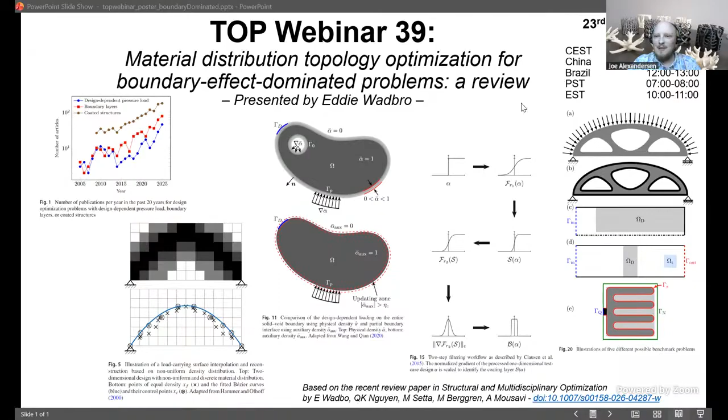And this is, well, I will talk about the review paper with me and my co-authors. It's a field that we're very interested in. We have read a lot, and also in the paper there are many, many references. And in my presentation now, I will have 0 references, but more focus on, well, trying to give you my sort of view and my interest on this paper.

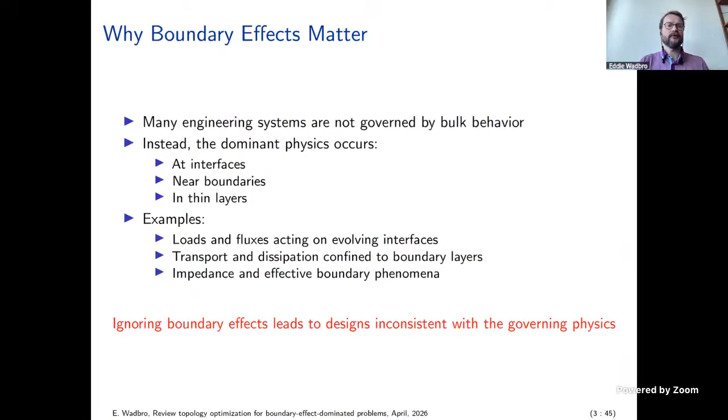And in all of these cases, ignoring the boundary effects and just looking at the bulk, well, we can of course use material distribution optimization anyway, but if the model or the partial differential equation we have does not take into account these effects, the designs will be performing well, but not for the true governing physics. So this is the whole idea why we started getting interested in this and looking into various problems for it.

So, and just trying to define, okay, what do I mean with a boundary effect dominated problem? So I put up like 2 major points, or 4 depending on how you count. So number 1 is the physical response depends critically on the position of the interface and the geometry of these boundaries. And the boundary itself, well, it depends on the design, and it's an active part of the governing physics.

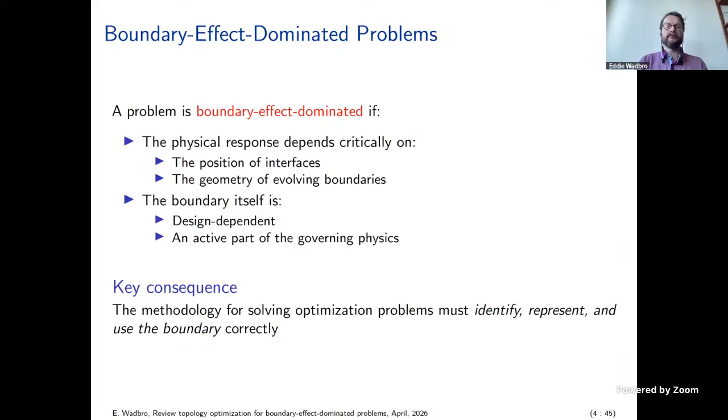So the key consequence here is that the methodology for solving these optimization problems must be able to first identify, represent, and use this evolving boundary correctly. So this is sort of the whole background for any optimization you want to do for these problems.

And also a graph from the paper, sort of, why these problems now? Looking at the growth of design optimization problems that involve design-dependent pressure loads, boundary layers, as well as coated structures over the past 20 years. And here I know that the coated structures are sort of not really boundary effect dominated, but since the techniques for coated structures sort of translate over, we decided to include this in this review as well,

because essentially the story here is that the same techniques occur across all types of physics, but of course when you start studying one problem, you may be able to tinker a bit to get this better. So in essence, this graph tells us that boundary effects are no longer niche problems.

They come in multiple application areas, and the challenge here is that the standard assumptions that lie behind density-based optimization, starting from linear elasticity, doing compliance minimization, sort of do not really perform perfectly without some extra special fixes. And people have been acknowledging this and working on boundary effect dominated problems for at least over 20 years, even though we just limited this graph to the last 20 years. Right?

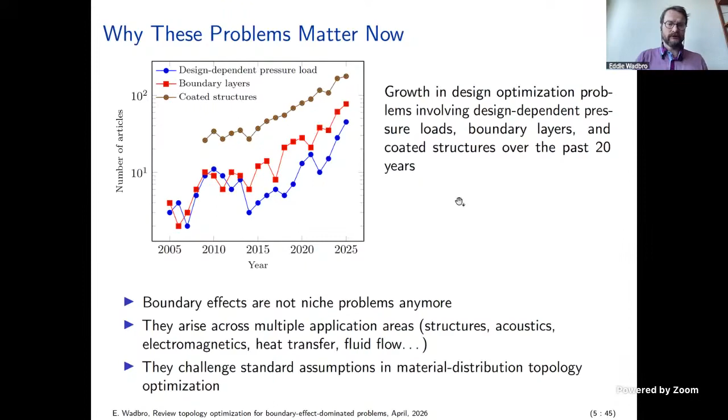So if I look at standard material distribution topology optimization, what we have here is a distributed field, which I will call alpha, that is in [0, 1]. And this distributed field will enter into the partial differential equation and define various physical quantities.

So the geometry is implicit, and traditionally this has been developed for, and it works extremely well for, bulk dominated problems where boundary conditions are of Neumann or stress-free type, so they're natural boundary conditions that just sort of disappear, and when we put up the variational form, it all falls out naturally.

However, this sort of intuitive description of just extending the domain of integration becomes problematic when the physics depend explicitly on the boundary, such as for pressure loads, convection, or when we have impedance boundary conditions. And so depending on how you view it, the difficulty is not the background optimization, but that we actually have this implicit definition of the geometry as well as the boundaries.

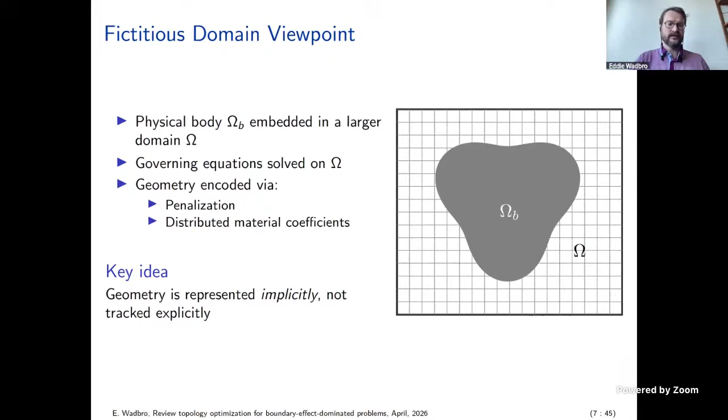And with that, I'm moving away from the general introduction to the classic view on this. So if we look at the history, fictitious domain methods mean that we have a body that we're interested in that is embedded in a bigger domain omega, typically a square or something nice. Then we solve the governing equations inside omega, and the geometry is encoded either via penalizations or distributed material coefficients. The key idea is that the geometry comes into the partial differential equations through some coefficients, but it's not explicitly tracked.

Looking into these ideas, there is much more in the article, but they have emerged independently and in multiple communities, and can at least be traced back to the 50s. It comes under different names depending on the field: fictitious domain methods, immersed boundary methods, or domain embedding techniques.

But in all of these, even if the background is in mechanics, fluids and so on, it's driven by similar needs. We want to model complex or evolving geometries, but we like to solve problems on fixed, often Cartesian discretizations, because this is where, from a compute perspective, we can get much speed. We have a structure that we can utilize when solving this.

Nevertheless, the idea of embedding a difficult domain where the physics happen into an easier domain and solving the problem there is a recurring idea that has been rediscovered over and over again. And yeah, I will repeat again. So why does this actually matter for topology optimization?

If we just look at this from the most basic problem, the standard model problem, compliance minimization in structural mechanics or linear elasticity, this is inherently a fictitious domain method where the design field that I call alpha consistently, which is typically called rho, encodes the physical body, but we never look at where the boundary is.

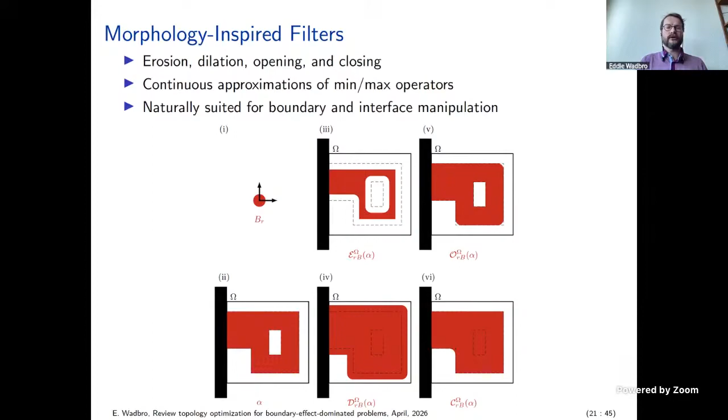The erosion is the dual operator, so you take a pen shaped as B and you move it around in the complement of your design, and you just erase out whatever you can. And if you do an erosion followed by a dilation or vice versa, we get these opening and closing operators. Initially, this is defined using min and max operators, but for natural causes, when we use this for optimization, we want to use continuous approximations of these operators. And these filters are naturally suited for boundary and interface or boundary strip manipulation.

The good thing with casting this as a PDE is that we have highly efficient solvers available. You can do multi-grid, get this really quickly. It naturally extends to complex geometries, and it's particularly attractive for large-scale problems. And this parameter R is indeed correlated with the feature size you get. So it shares many features with the convolution-based filtering.

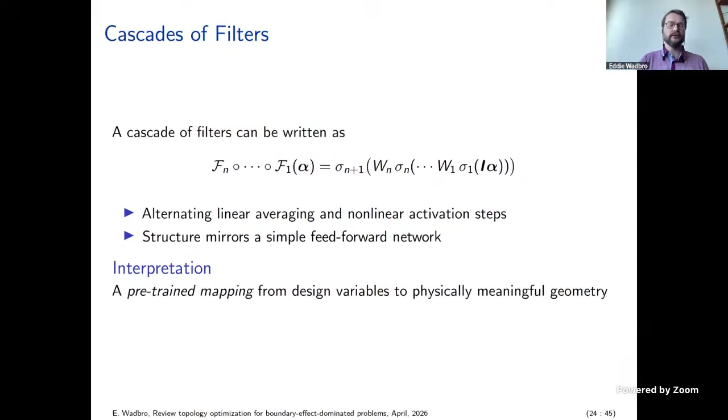But if I look carefully at this structure here, this is an alternating linear averaging and nonlinear activation step. So this is exactly the same structure as we have in a simple feed-forward network. So one way to interpret the filtering that we do is that this is a pre-trained mapping from design variables into a physically meaningful geometry, which sort of couples nicely to what we actually want to do.

Right? And why do these sort of cascades matter for boundary effects? Well, cascades enable us to do explicit extraction of the interfaces, not just like an erode or a dilate, but we can combine these different filters that we have. The combo of dilate-erode can extract a boundary strip with controlled thickness. We can do multi-field representations, so we can get different parts out if we have multi-material topology optimization. And the good news is that we do not need to track the boundary explicitly, and this is indeed a cornerstone for these boundary-effect-dominated problems.

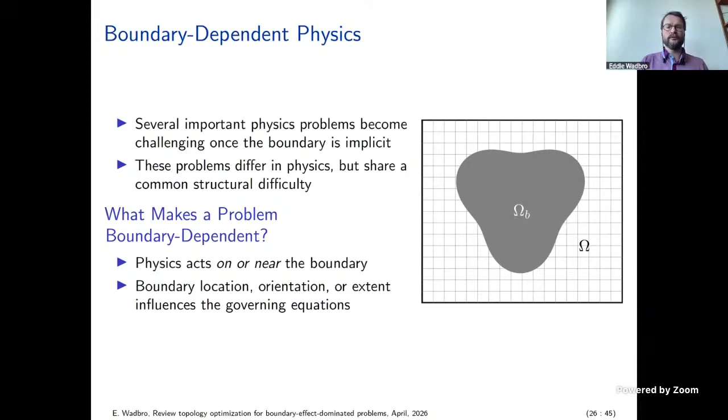And next, I would just like to mention a few words about how these ideas can be used to treat design-dependent boundary physics, not just how they are treated now, but also trying to give a little bit of ideas on the core evolution of the methods. So again, boundary-dependent physics, same motivation as earlier. Many of these problems become challenging because the boundary is implicit, right? If we knew where the boundary is, say if we used a level set discretization, we could just put in the boundary conditions and go nicely. But what I will talk about now are various problems that differ in physics. They share a common structural difficulty, and we can get through this using similar ideas.

So one of the first problems that people started looking into in the community that is actually design dependent are the design-dependent pressure loads. So still linear elasticity, but where the load actually depends on the location and the orientation of the boundary, right? So where the boundary is, we want to put our traction forces and so on. The early approaches started off with an explicit reconstruction of the pressure surface. So we have our design, and then we pull out the pressure surface and explicitly track it.

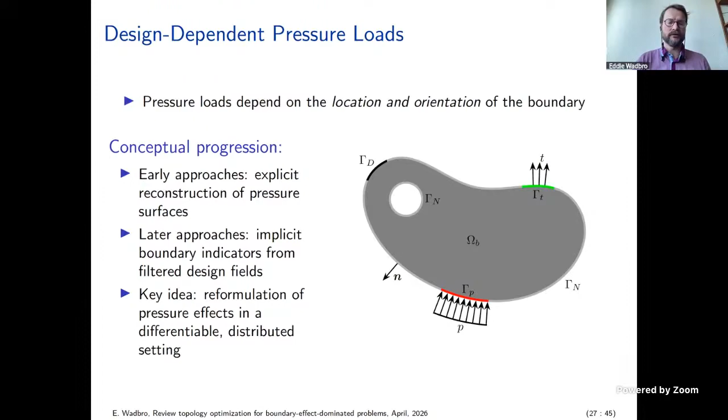Later approaches were more implicit, where we tried to get the boundary indicators out from filtered design fields, and then put these filtered design fields into the variational form. The key idea here is that we reformulate the pressure effects on the boundary into a nice differentiable distributed setting. So we smeared out where these things happen into a sort of tubular neighborhood around where they should be.

And a very similar problem, in my view, is the design-dependent heat flux and convection. So the heat exchange depends on which parts of the boundary are exposed, so we do not have this over all of the boundary. In this case, the conceptual progression was very close to that for pressure loads. So if the idea is out there, you can see which other problems we can attack. Starting off with explicit identification of exposed boundaries, and later on people in the field started using surrogate boundary indicators from filtered design fields. And the key idea here is to reformulate this convective heat flux in a differentiable distributed setting.

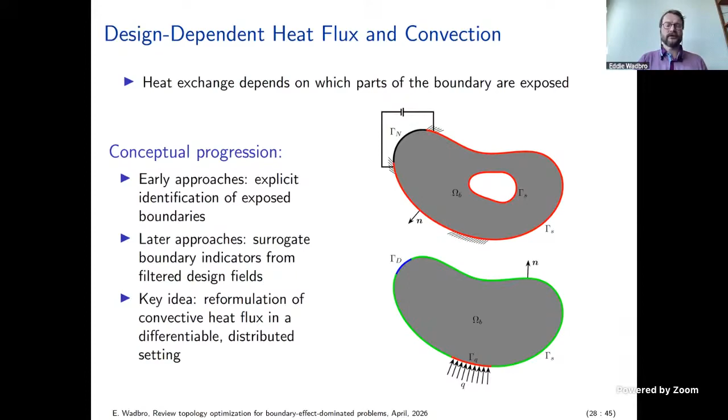So in my view, same, but different. In other words, the two problems do share the same structure, but the physics are different. For the pressure loads we have boundary-localized forces, and for the heat flux we have boundary-localized heat exchange. And in both cases, for pressure loads, the direction and magnitude depend on the interface of the geometry. And for the heat flux, the coefficients depend on the exposed surface. Is it exposed or not?

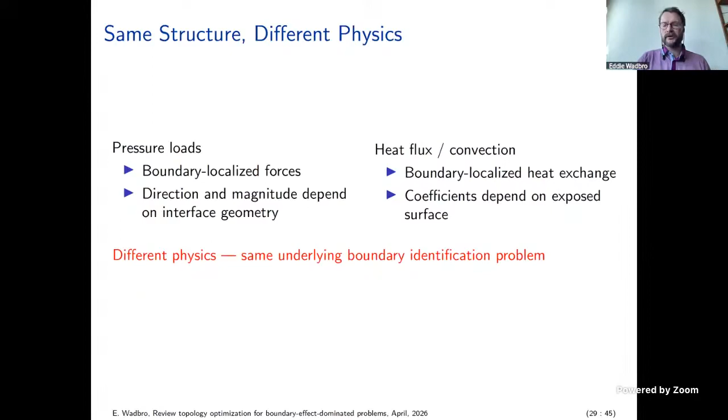The physics are different, but we still have the same underlying problem. A third sort of classic problem in optimization. So the two previous problems that I talked about, the design-dependent pressure as well as the heat exchangers, they are turn of the millennium. Coated structures, I think this started more around a decade ago.

And the cool thing there is that these coated structures introduce explicit boundary layers at the design's boundary, or in some sense, right? So the challenge is not only where the boundary is, but how thick it is. And to extract this, the early ideas were that we take our alpha, we filter it, we look into gradients or isocontours of this filtered field, and then later on one started to look into more filter-based construction of finite width boundary strips and doing direct control of the coating thickness and separation of length scale.

And here is just one of these classic approaches where we take our field alpha, filter it, compress it, filter again, look at the gradient of this one, and then get a boundary indicator out that directly depends on the design.

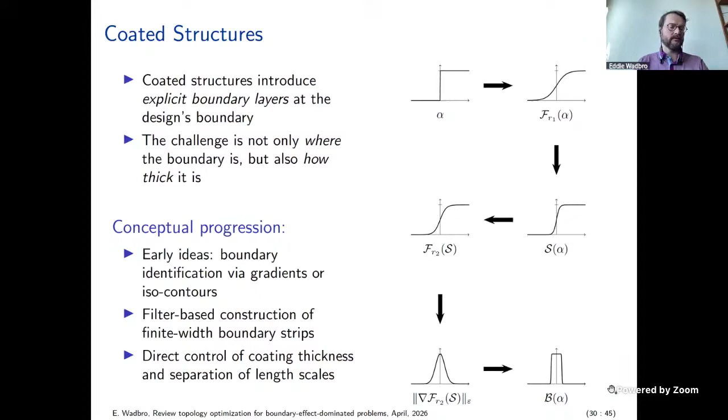And if we increase the boundary complexity: in the pressure loads, we only cared about the location of the boundary. In heat transfer, we looked at which parts of the boundary are exposed. And in coatings, we now look at boundaries that do have a thickness. And the shared difficulty here is that we need to identify the boundary, we need to identify interfaces, and we need to have a controlled boundary representation.

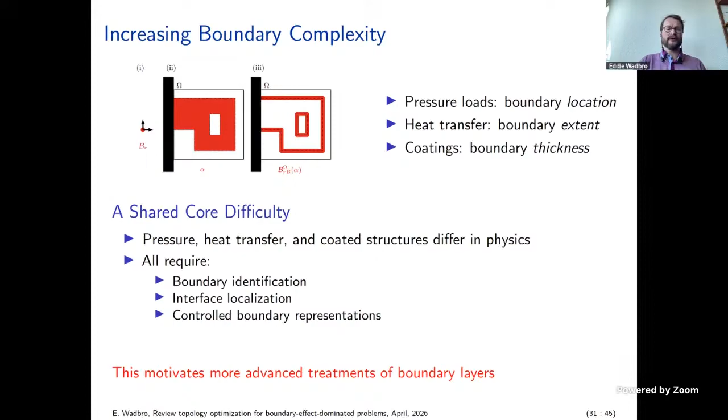So these are all, I'd say, from a boundary identification perspective. Of course, similar techniques can be applied across all types of physics. But this motivates a more advanced treatment of boundary layers. So which problems can we now solve, or what are the next steps? A natural way is looking at problems with layers.

So why are layers particularly challenging for material distribution optimization? Well, if we go to the extreme, take Navier-Stokes. An accurate simulation of Navier-Stokes requires an extreme mesh refinement close to the boundary. And in material distribution topology optimization, our boundary gamma evolves and is not explicitly tracked, right? So we cannot really hope to get these layers fully refined. Local mesh refinement breaks because in the fictitious domain philosophy, we should not know where the boundary is. It should just be encoded by coefficients that enter the equations.

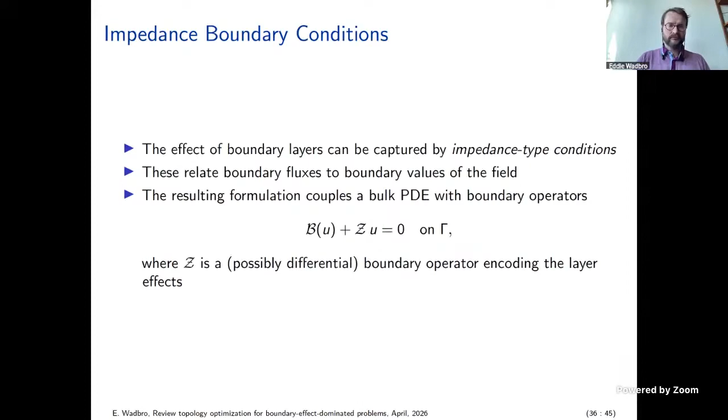So, just the same thing here as many times earlier in the talk. For both electromagnetics and acoustics, the bulk of the variational form is unchanged away from gamma. We can ignore these effects further away, but the layer effects do appear as additional integrals over gamma. The boundary operator is different in the two cases: it's an algebraic operator for the skin effect, and a differential operator for viscothermal acoustics.

But the insight here is that seemingly different physical problems lead to very closely related variational formulations, which means that we can treat them within a unified framework. So this opens up for a nice coherent treatment of the problems.

And if we do have fixed meshes, in material topology optimization the boundary is never explicitly available. So the boundary integrals must be expressed on the fixed mesh. This is achieved by using boundary indicator functions. Normally we take our design and resolve it on our mesh by an element-wise indicator function. What is added to take care of boundary effects is a function that lives on the element edges or faces.

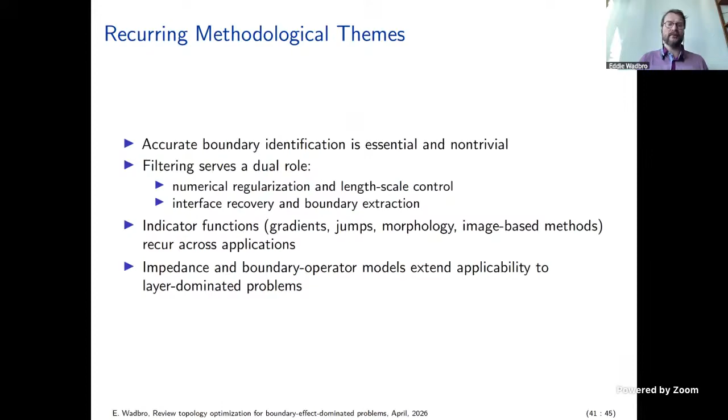And by using impedance and boundary operator models, we should be able to extend the applicability to even more interesting or challenging boundary-dominated problems. So of course, we're not all the way there. We have not solved everything. The remaining challenge is that we don't yet have a robust and accurate boundary identification. This is still somewhat of a bottleneck. So it comes with a cost. The high-fidelity physical models do increase the computational cost.

And just looking at what type of problem we are looking at, what are the trade-offs? Of course we want a sharp interface. But to get the sharp interface, we need to increase the nonlinearity of the operators, which harms the differentiability of the complete mapping, which makes the optimization more difficult to solve. And also nicer, more smoothly varying fields make it easier to create scalable and robust numerical methods. Another remaining challenge is that so far there are not that many standardized benchmark problems, which complicates comparison and validation.

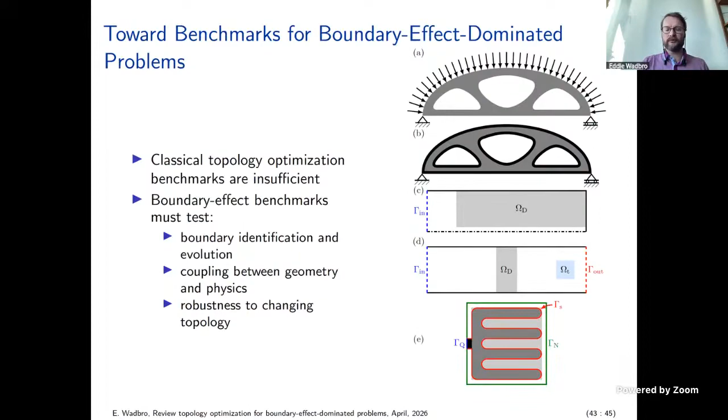My final perspective is that boundary effects have defined a new frontier in topology optimization. The progress requires us to do boundary-aware modeling and get scalable algorithms, because as time progresses, people want cooler and cooler designs, more difficult physics, preferably everything in 3D. The material distribution methods remain powerful, but we must extend these thoughtfully, thinking through what the next natural step is and which difficulties to add next. There are lots of interesting problems, and boundary-effect-dominated problems are, in my opinion, central to many future advances in physics-based design optimization. There are other things to consider as well, but this is one that I intend to look more carefully into.

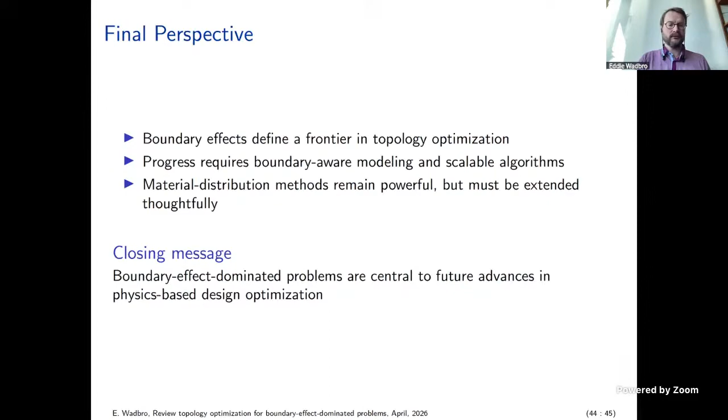That was a great overview of a large body of work and an evolving field, as you mentioned. I, of course, suggest everyone go look at the paper. It's open access, so everyone can read it, no matter where you are or where you come from.